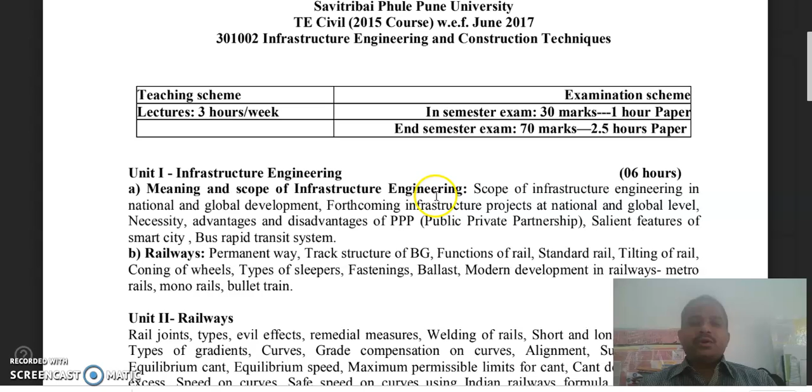Now we will introduce the syllabus of this subject, Infrastructure Engineering. As we know, infrastructure is a basic important facility that we need to consider. If good infrastructure facilities are provided, the development of that particular area or region is going to occur definitely. So in this subject, we will see basic infrastructure facilities.

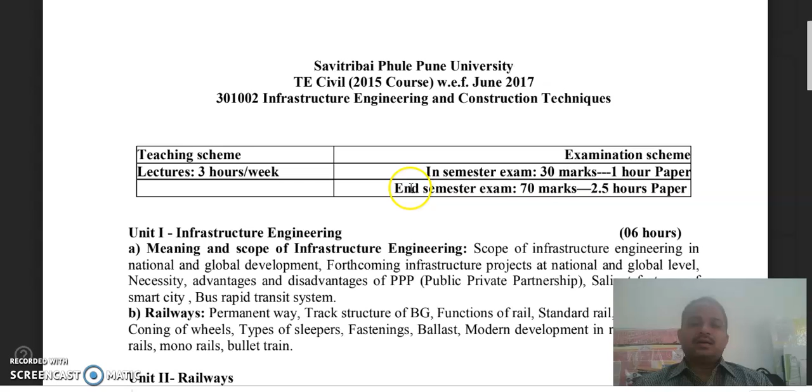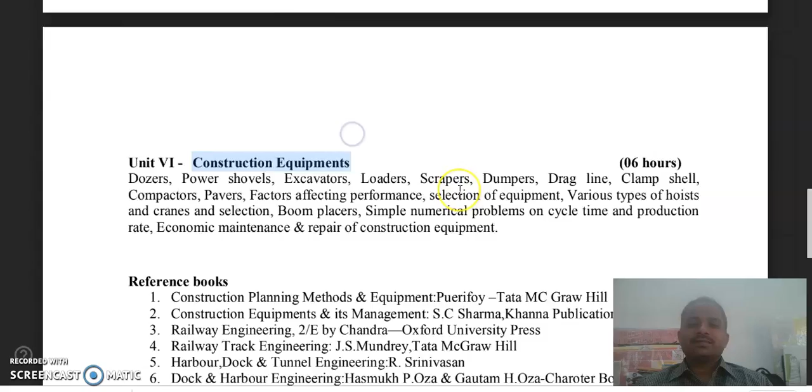In that, you will see mainly railway engineering, some construction techniques, tunneling, then docks and harbors, and some construction equipments. Basically, all these infrastructure facilities are going to give good services to the users, and indirectly they are going to give good employment opportunities.

Speedy transportation will help reduce travel time, and materials can be transported from one place to another easily. This infrastructure sector also plays an important role in national development, because all these sectors or subsectors are interdependent on each other.

Likewise, if good roads are constructed, development will occur in other sectors also. More industries will come up, good cities will be developed, decentralization will be observed, and remote areas will also get developed. Migration will get reduced, as people will get employment opportunities at their own place.

Likewise, Baramati MIDC is providing employment opportunities to nearby people in the Pune MIDC. Similarly, all these infrastructure facilities will play an important role in the overall development of any region.

So this is the starting of our subject, infrastructure engineering, meaning the scope of infrastructure engineering in national and global development, and forthcoming infrastructure projects at national and global level.

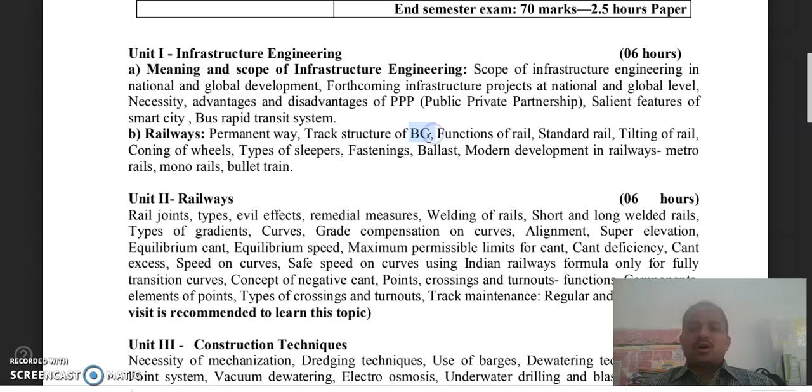These are some technical terms from railway engineering that we will see through one PPT: permanent way, track structure, and there are three types - broad gauge of 1676 millimeters, narrow gauge, and meter gauge. Functions of rail - the mainly important parts of the railway system are the rails, sleepers, and ballast.

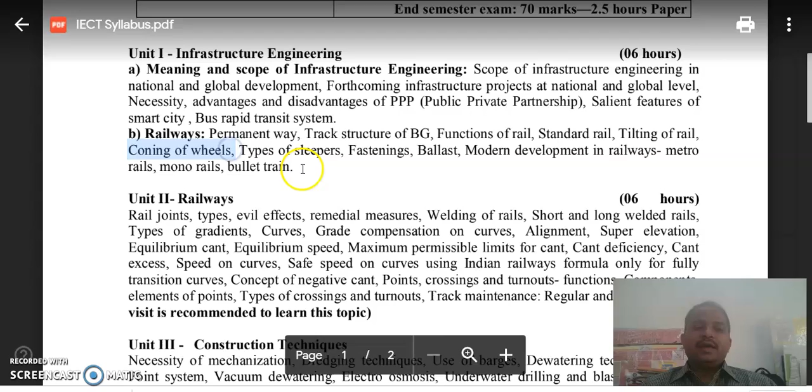There are different types of rails. Then tilting of rail is a concept, and coning of wheels is another concept. Sleepers can be classified into different types based on the material, and different fastening systems are used.

We have visited Baramati railway station for better understanding of this railway engineering part also, covering ballast and modern developments in railways, such as metro.

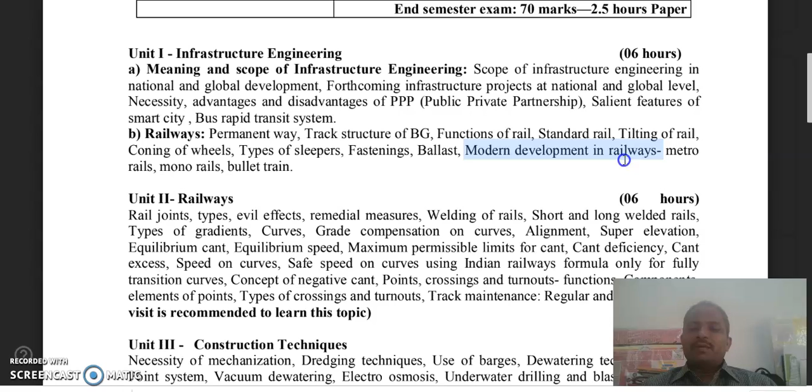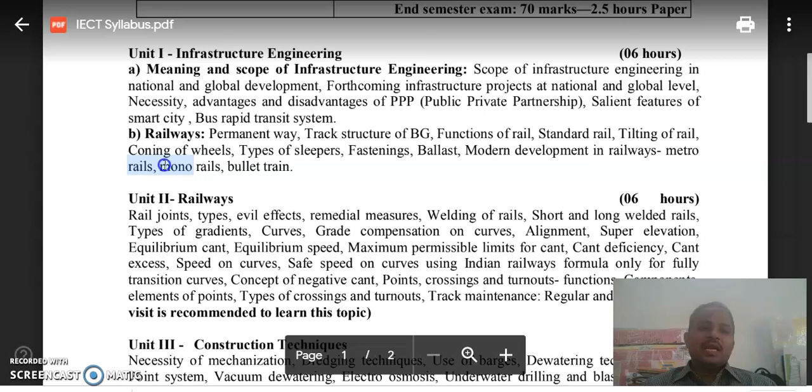Almost in all metro cities like Kolkata, Delhi, Mumbai, Pune, Bangalore, and Hyderabad, metro construction is in progress or already completed in some cities. Similarly, monorails are there, and bullet trains are also there. In case of Japan and China, they have developed good bullet trains.

Then we will see rail joints, types, evil effects, remedial measures, welding of rails. In factory, it is not possible to construct longer rails, or production of longer rails is not economical, and it is also a difficulty in transportation. So rails are produced in sufficient length and are again welded on site, accordingly classified as short and long welded rails.

Types of gradients. Gradients means slopes, curves. Curves are horizontal as well as vertical. Grade compensation on the curves, alignment, super elevation. Super elevation is like banking, angle of banking provided to roads on the curvature. Equilibrium means to have balance, and equilibrium speed is the speed at equilibrium.

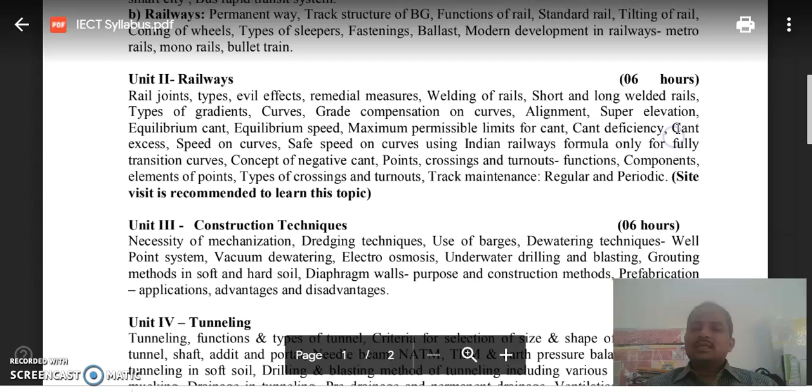Maximum permissible limits for cant deficiency and cant excess. If we are not utilizing the cant, that remains as excess. Speed on curves, safe speed on the curve using Indian Railway formula, only for fully transition curves.

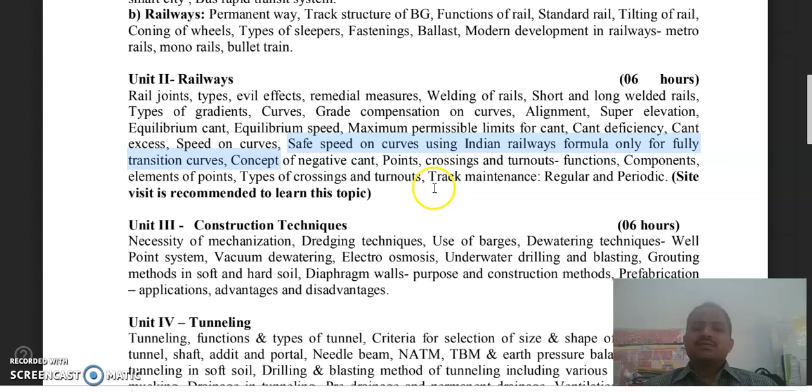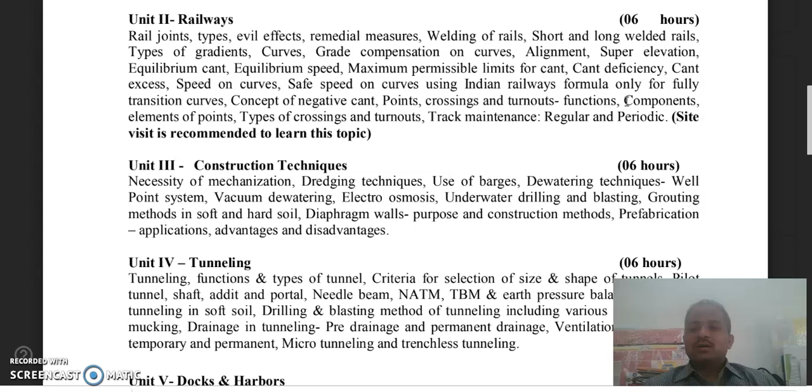Concept of negative cant, points, crossings. We see that there is only one track in between two stations, but as we come near to a railway station, there are many tracks to enable parking of different trains, to take passengers, or to unload goods through the platforms. So we study components and elements of points, types of crossings, turnouts, and track maintenance, both regular and periodic.

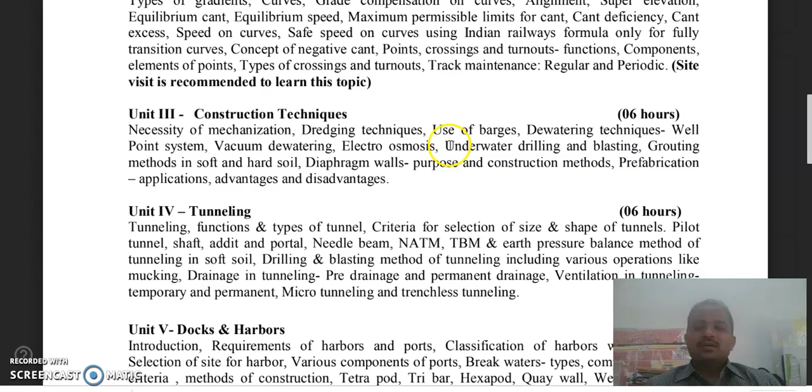So we have visited Baramati railway station to understand all these concepts in a good manner. Then, construction techniques.

Different advanced construction techniques are available for construction of different types of systems or infrastructure. We can say necessity of mechanization—mechanization means use of machineries for construction. It will reduce the time required, and work can continue for 24 hours. There are limitations to carry out work by using manual means.

Dredging techniques: dredging is removing sediments, or sand, from the river system or seabed using barges, small ships. Dewatering techniques: how to remove water from underground sources, like well point system. Vacuum dewatering. Drainage of any system is very important in construction, even for the construction of foundations. So vacuum dewatering is one of the other methods.

Electroosmosis, underwater drilling and blasting—sometimes we need to drill and do blasting at the lower level. Grouting methods in soft and hard soil: grouting is used to obstruct flow of water in soft and hard soil. Likewise, you must have seen grouting used in the case of tunnels also.

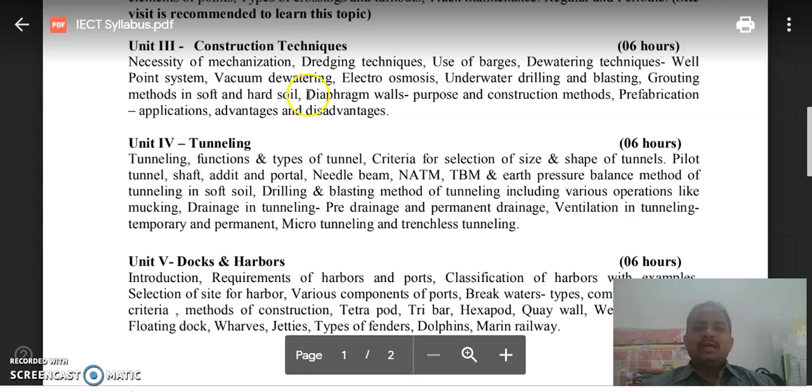And then diaphragm walls—purpose and construction methods, prefabrication, application, advantages and disadvantages.

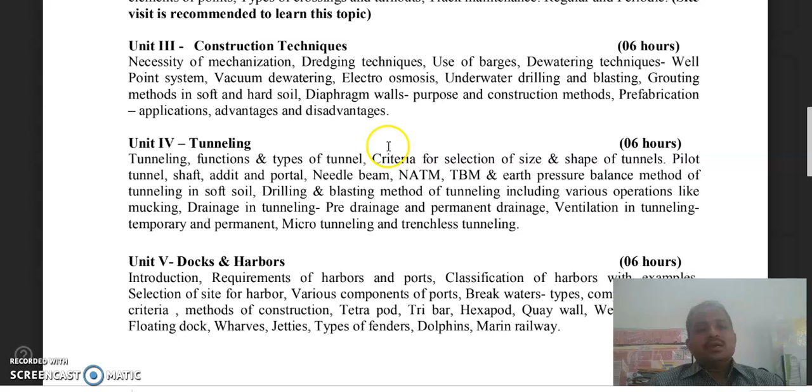Similarly, in unit number 4, we can see tunneling. Tunneling is also important considering its use—by using tunnels, we can cross hilly areas easily without considering a guard section, and similarly water can be passed from the hilly area. For many purposes tunnels are constructed, and during our visit we have gone through the tunnel, that was Khambatki tunnel near Satara.

Tunneling functions—there are many advantages as compared to open cut or open excavation, which will give instability to the slopes. So tunneling provides easy access without any slope, or steep slope, we can say.

Functioning and types of tunnels—based on the shape and use, tunnels can be classified into different types. Criteria for selection, size and shape of the tunnel depend on the purpose for which we are constructing it, and the size depends on the overall size of that particular requirement.

Pilot tunnels, shaft, adit and portal, needle beam method, NATM method, tunnel boring machine, and earth pressure balance method of tunneling in soft soil, drilling and blasting method of tunneling, including various operations like mucking.

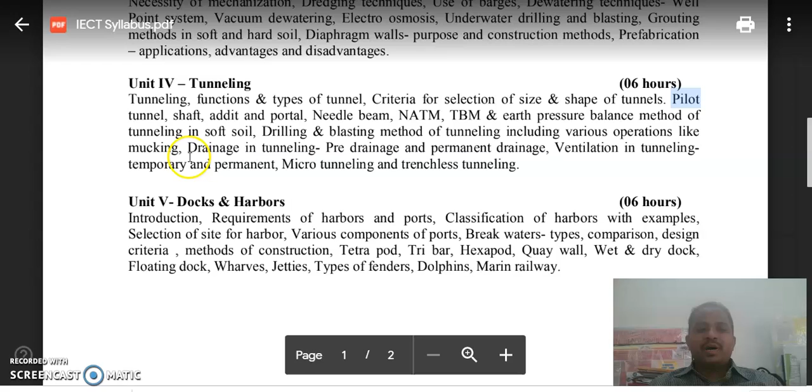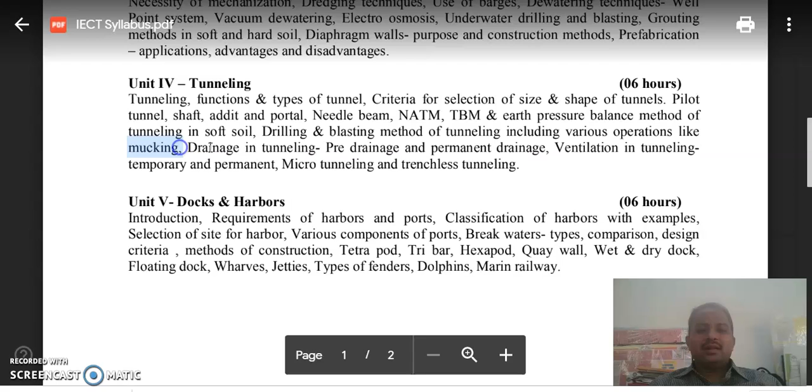You can see the use of these advanced tunnel boring machines in case of metro. In Mumbai, there are different routes for the metro, and they have used such advanced tunnel boring machines for construction of underground tunnels. Mucking means the excavation or removal of excavated material from the tunnel, and there are various methods for mucking also.

Drainage in tunneling—pre-drainage and permanent drainage. Pre-drainage is removal of water during excavation, that is temporary. Permanent drainage means after completion of tunneling we need to provide drainage facilities for the particular usage. Similarly ventilation also—there is less air circulation inside the tunnel, so we need proper ventilation during construction as well as during its actual use.

Micro tunneling, trenchless tunneling—these are some techniques used for smaller size tunnels, and with the help of all these techniques tunnels are constructed. Thank you.